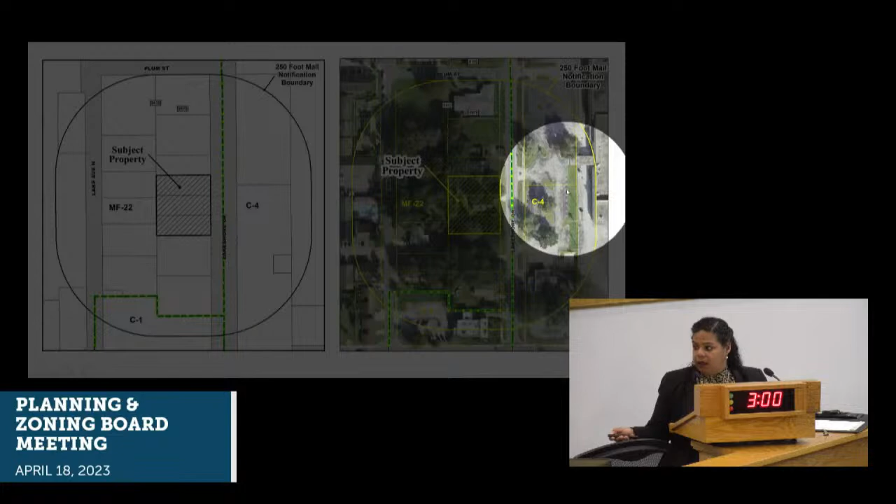The map displays here the general location of the property, and the surrounding uses are all single-family residential to the north, west, and south, and then a retail plaza to the east. The property is currently vacant on approximately 0.46 acres.

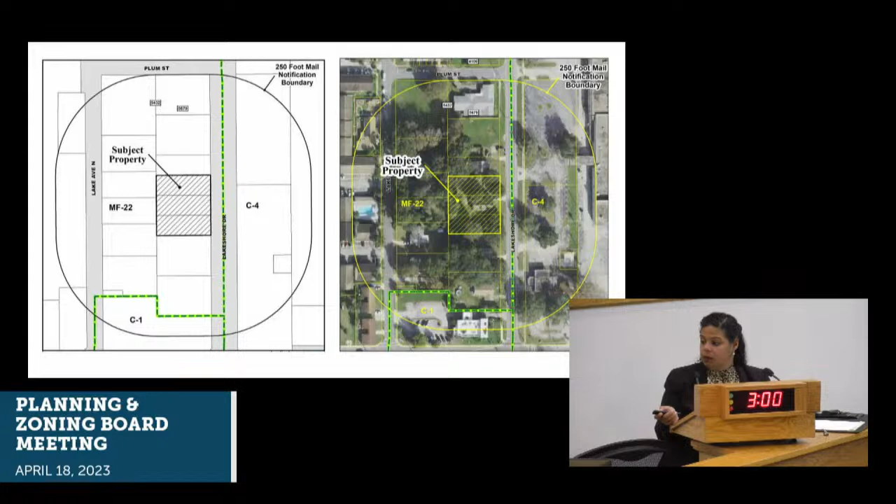These here are current images of the property. This is facing the property. There was a former single-family home that was recently demolished on the property, so the old driveway is still there. This is on the east corner facing northwest, and you see the adjacent single-family home in the foreground. This is the east property boundary facing west.

This is the adjoining plaza that's to the east of the property. This is the street view facing south towards East Lake Parker Street, and this is the street view facing north. This is the proposed site plan of the 2 duplexes that will be on the property.

Currently, the parcel is a 3-lot parcel, and it will be divided into 2 equal lots. The total lot size is 150 wide by 135 deep, so the parcels will be divided 75 feet equally just to have the duplex fit properly on there. I will stop here and allow the applicant to answer any of your questions before I read the conditions. This is for consideration of approval, to go to City Commission next month.

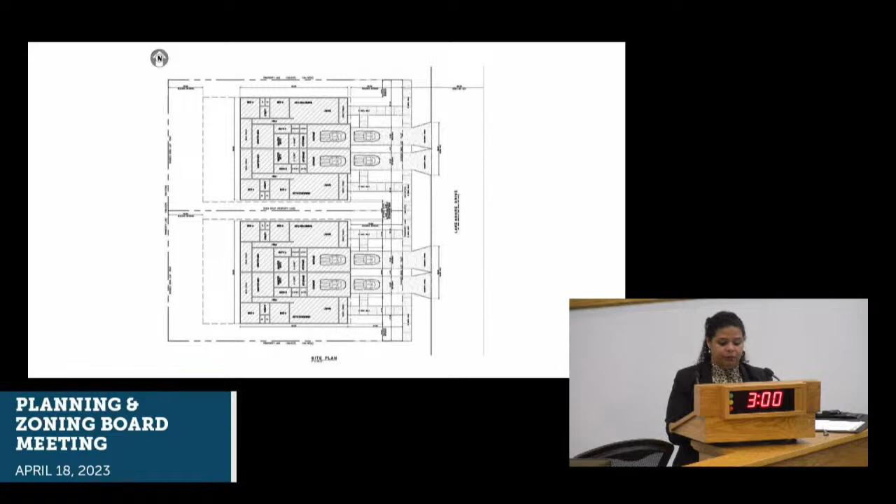Good morning, everybody. I'm Ben Beckton, born and raised here in Lakeland, and Samuel Graybill is our civil engineer who submitted the application. Our office address here in Lakeland is 227 North Tennessee Avenue, and my personal address is 3412 Lilas Court.

This is my first time speaking before you, so apologies for any mishaps. We acquired this property as a package of 18 homes that we purchased a couple of years ago. We just felt that the home was quite dilapidated and didn't merit a remodel, and there was a much higher use for the property in that area.

So we started this process and engaged Sam. Originally we were thinking of doing a larger project, but found that it was cost prohibitive and that there wasn't enough space for parking and drainage and things like that. So we combined the lot, but we feel now that dividing it and providing 3-bedroom duplexes to 4 families is an incredible use for it.

We're actually licensed general contractors as well, so we'll be constructing this project. So we have full control over getting it done quickly, efficiently, and building a structure that will be a benefit to the city long term.

We also, having dealt with lots of properties—I'm in the real estate industry here in Lakeland—there's a severe demand, as you likely know, for rentals in this area, and they've become almost a price gouging standpoint for the available inventory.

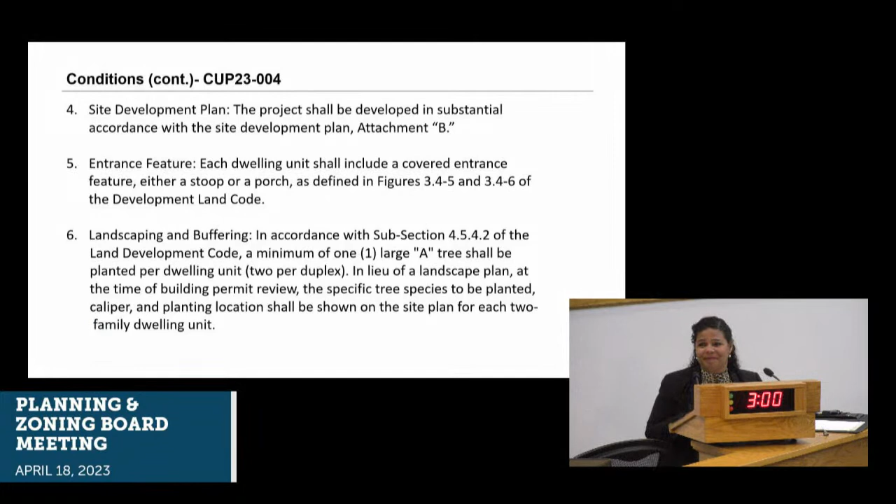Any questions from the board on conditions? None? Now do I hear a motion that we approve the request subject to conditions set up by the city? I move to approve with the conditions. Second? All in favor? Aye. All opposed? No. Motion's approved.

Item 2, minor modification of planned unit development zoning for Lakeland Central Park to allow for the allocation of existing multifamily residential entitlements within parcel 12 on property located at 2615 Airport Road. Owner LCP Phase 2 LLC, applicant Timothy Campbell, and this is for consideration of final decision.

Thank you, Mr. Roberts. Good morning. For the record, my name is Phillip Scearce. I'm Principal Planner with Community Economic Development. We have a minor modification to Lakeland Central Park development. We'll show you, this is the site here, New Tampa Highway, Airport Road. They have a spine road, Winston Park Boulevard, which connects with the Steeplechase on the east side of Airport Road.

So again, this is the site here. The site is currently under construction for Phase 1, which comes in these portions. The Winston Park Boulevard has not been punched out to Airport Road yet, but the area in question is right here. As PUDs get modified over time, or as in this case, as the more advanced engineering has occurred, not land uses get allocated, but storm ponds, wetlands, floodplain mitigation - those things kind of get altered as you get into that fine engineering, as you nail down the final engineering.

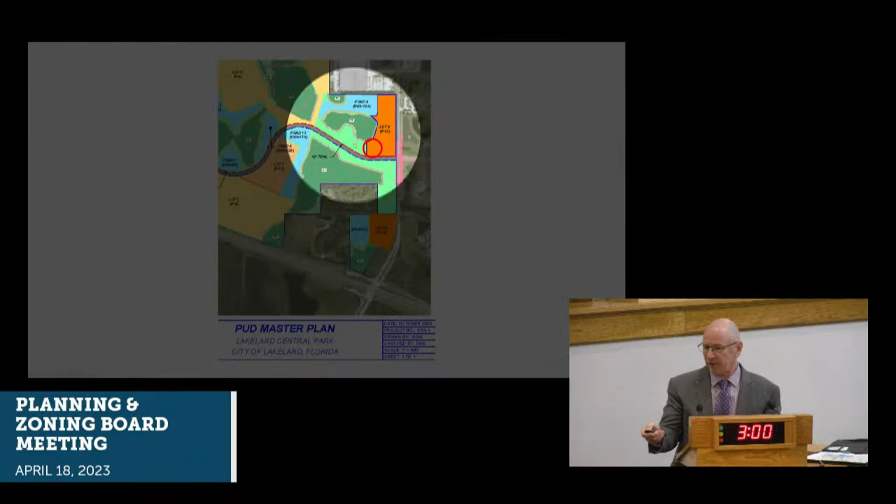It also is growing a little bit, and I'll show you here in a little bit more detail. That orange area is growing a little bit here to accommodate for that multifamily.

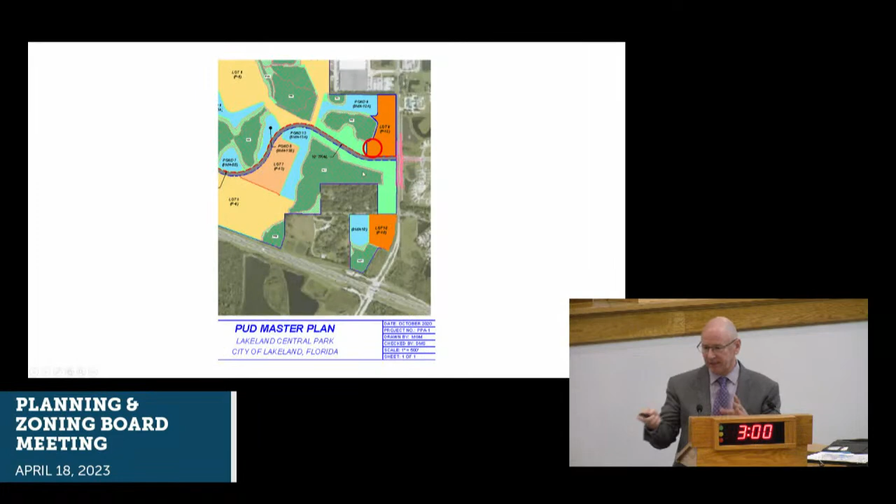Nothing else changed. Winston Park Boulevard on this portion, on this phase of Lakeland Central Park, has not been brought out to Airport Road yet. You'll see that in the slides here.

This is looking north on Airport Road into the site where the multifamily is proposed. This is looking southeast at Airport Road and Winston Park Boulevard, looking into Steeplechase.

This is looking directly at Laurel Highlands. Lake Laurel Highlands. Excuse me, I apologize, I get those mixed up. Lake Laurel Highlands. I should know that.

This is looking right at the west, right at Airport Road at Lake Laurel Highlands. This is where Winston Park Boulevard will get punched out eventually. And this is looking east into Lakes Laurel Highlands, standing on the sidewalk there on Airport Road.

The site plan, this is only a conceptual site plan for the multifamily. Multifamily and residential uses have already been included as part of this PUD. They're just moving the location. That's why this is a minor modification.

So this is Winston Park Boulevard here, and this is going to be the multifamily, 252 units. And I'm going to stop here and let the applicant come up and speak and give you some more detail about the project.

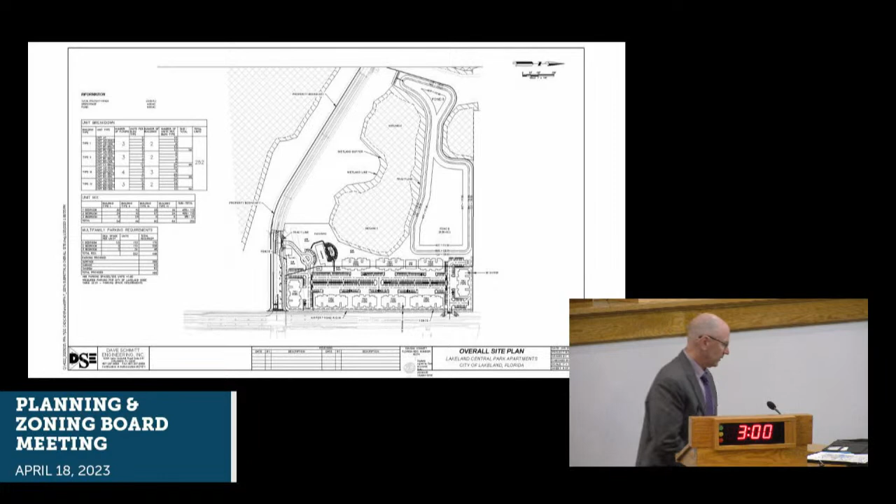Good morning. For purposes of your record, I'm Tim Campbell, law firm of Clark Campbell Lancaster Workman and Airth, 500 South Florida Avenue. I don't really have a lot to add.

This is pretty simple, and this is consistent with the staff's desire all along for Lakeland Central Park that it not be all industrial. They encouraged and desired residential and office type of uses, although it's a difficult site to do some of that. So what the developers found is that this parcel was ideal for a multifamily development, and it's allowed there except for that one prohibition in Exhibit C. So we're just asking that the prohibition be removed.

The change, and I'm glad the site plan's up, the change in the size of the parcel is to allow the access there on the spine road to be as far west as possible to keep it away from the intersection. So it's a relatively simple request. Thus it's coming to you as a minor modification. We stand available for any questions that you have and request your favorable consideration.

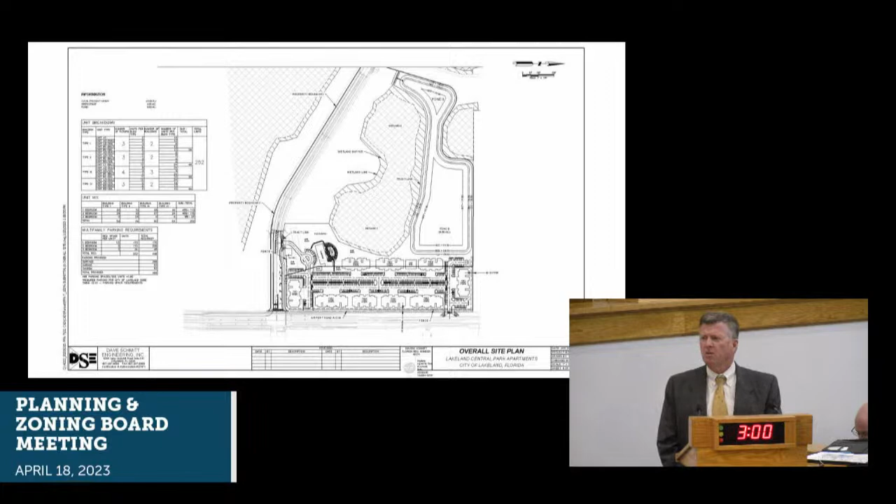And I'll jump in with a little additional background as well, that this was the former Lakeland Central Park Development of Regional Impact. It was approved back in 2008. It's a 729 acre mixed use development that has a history on it from the DRI, now Planned Unit Development and Zoning Ordinance. But it also has a development agreement in place which addresses transportation concurrency.

So in terms of this particular use relative to the retail, the trip trade-outs work, it all falls within the bounds of the development agreement that was approved by the City Commission back in 2020. So everything here is still part of the overall master plan, and as Mr. Campbell noted, it's our desire to see something that is a true mixed-use development.

What is good about multifamily on Airport Road too is it helps with the transition between more intensive warehouse uses as you start to move further west and north towards Old Tampa Highway and Lakes Laurel Highlands across the street. So there's a lot that really works in terms of this plan here that's shown on the screen.

We do have a couple of tweaks that were discussed at the development review team, primarily related to the location of the lift station and the ultimate taper. The driveway connection, or Winston Park Boulevard connection to Airport Road, is still going through the DOT permitting process, and so there may be some changes there that come out of that effort.

But there may be some tweaks related to the lift station and the ultimate configuration coming up to Airport Road. How big is that parcel?

I'm sorry, this site plan is just conceptual, and it's not part of our request today. It will go through the development review team process, so staff will have the ability to provide comment on the details about the layout of the plan.

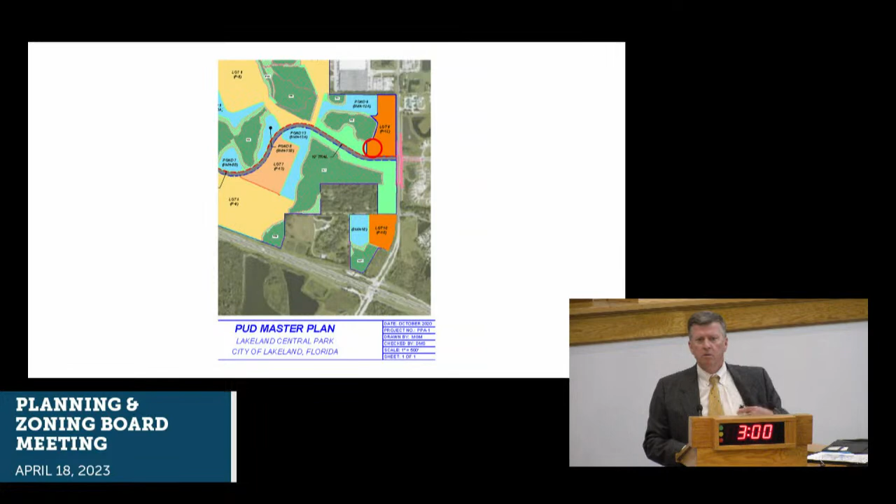Any other questions from the board? How many stories in height are these apartment buildings going to be? I don't know, the plans haven't even been submitted yet, other than this concept layout. They'll be whatever, we have all those restrictions built into the PUD, so we're not asking for a change to that. My guess is 3 stories, because that tends to be what's in the market now, a 3-story walk-up.

Any other questions at this time? So what's the background about why the restriction was there before? As I understand from the DRI, a lot of that just carried over to the PUD. Is this old DRI language? Good question. Chuck, do you remember why there was a prohibition on Lot 9?

I think the reason we had a prohibition there was trying to get more retail in the Airport Road corridor at a node that made sense. That was also back at a time when the multifamily market wasn't nearly as strong as it is today. Things have certainly changed over the past 15 years, and it makes sense now to get, at what will be a lighted intersection, more density, something that's a better transition with the single-family residential across the street, while we look at other opportunities for retail up and down Airport Road. That's really the big change, the market conditions and the fact that we need to be more cognizant of how we handle the transition from the warehouse industrial to the single-family to the east.

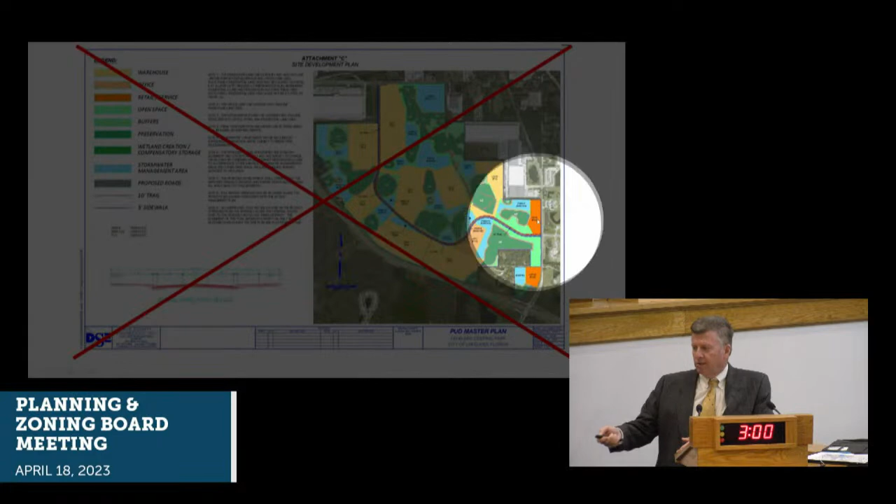Was it not the case that Parcel 6 was where the multifamily was originally intended? No, we're not moving it. The only thing we're changing is, there was literally something in here that says multifamily is prohibited on Lot 9, and we're removing that. But as I explained earlier, those residential uses are allowed in the orange-coded parcels.

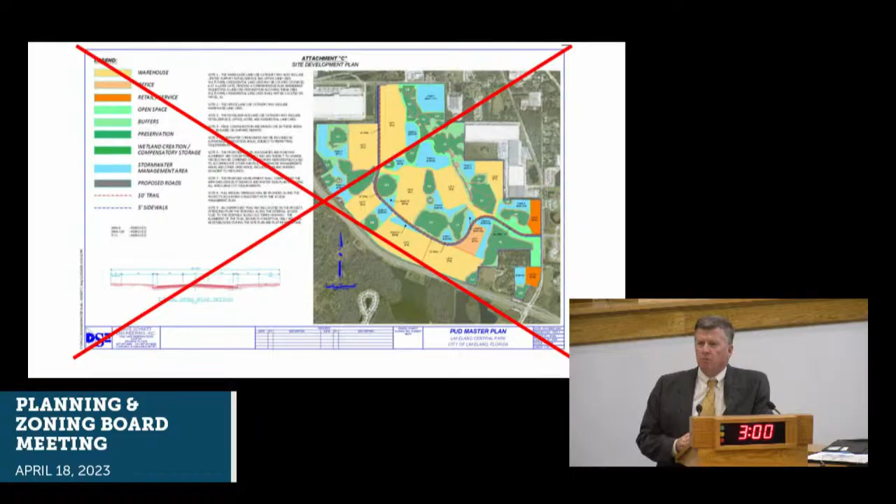As I understand from the previous hearing, these were anticipated for above retail dwellings. Am I incorrect in that understanding? Multifamily above retail? Yeah, that's never been a part of any of our presentations for Lakeland Central Park.

What is the language about the comp plan amendment associated with that note? This is in our PUD, so it doesn't change our comp plan designation at all, it's just within the PUD. My question is just about the note, the language of that note. Maybe somebody on staff can help me understand it. What does that language mean?

The note simply meant that on that parcel we could do any of the uses that fall within that orange, but not multifamily. I think Chuck probably explained it well, that at some point the thought was to encourage that mix, to encourage retail. The idea was that was the better spot for retail, but it's become obvious that it's not.

The note says the warehouse land use category may also include limited support retail, service, and office land uses. Multifamily residential land uses may be located on parcel 6 at a later date, pending a comp plan amendment requesting a land use designation allowing those uses. And that's to the west.

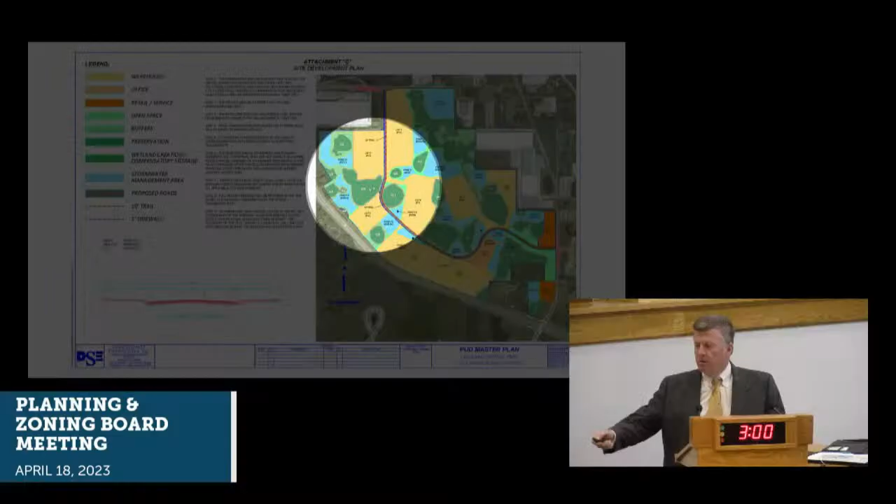As Chuck mentioned, phase one development is occurring here. You can see the pad on the Parkway being developed, buildings being developed here and here. So phase one is being developed. They're working on all the plans and approvals to gear up for phase two, and I believe the multifamily is in phase two.

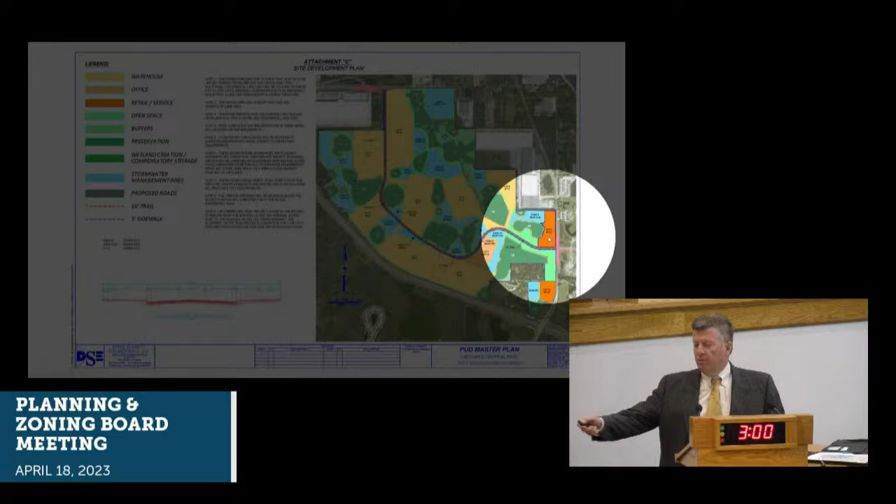One of the discussions we've had is if we plat phase two, even though this isn't ready yet, that we would plat this. So we'll move forward however the city requires, but since it's not phase one, we're not having to move the phase for the multifamily. My last question is, if we don't approve this today, where would the multifamily development fall in this plan?

Hopefully, in the unlikely event you would do that. I don't know. This site, at some point, if they acquired the other parcels—and this is the dark green, which is wet, so it's not developable—this is a more difficult site, so I don't know if it would be there or if we would lose the opportunity to have multifamily.

Within this industrial park, I think that's part of the staff's desire all along, and that's why the placement of these types of uses—the commercial retail and the multifamily residential—is along Airport Road, as Chuck mentioned, because it's a great transition from the single-family residential to the industrial.

And like I said, they've approved some commercial here, and at some point if we have commercial, it's really an appropriate planning transition into what will be all industrial and distribution facilities. So what I'm hearing is that this is really the last real potential for multifamily in this development.

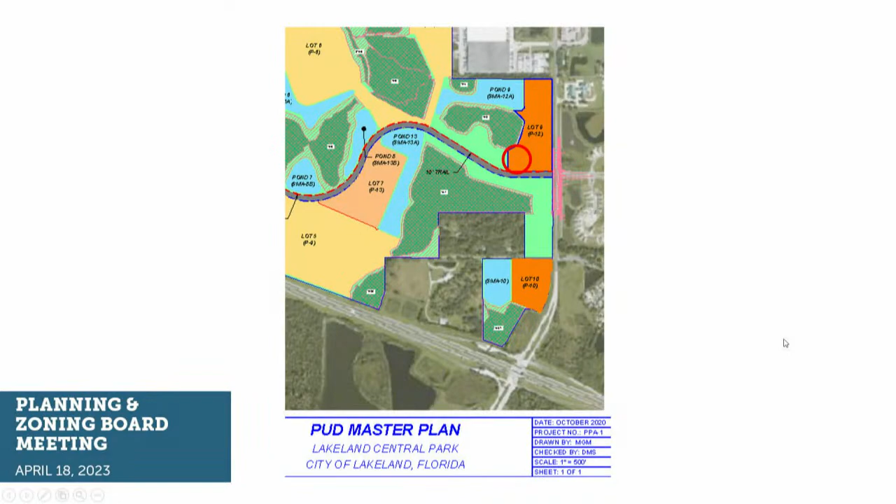I think that, because of the importance now of Western Park Boulevard and Airport Road, and just what we're seeing with the multifamily market, we all as staff agree that this really is much better situated, not only for road access but also transit service. The developer is working on a transit stop on Airport Road with the Citrus Connection, and we're working with them to potentially realign or better serve this area as well.

But it's better for them to do that off of Airport Road than more internal to the development. So I think, like Matt had said, the retail market is a lot softer out here than what it was, and the multifamily is so much stronger that it just really works from a connectivity and a location standpoint.

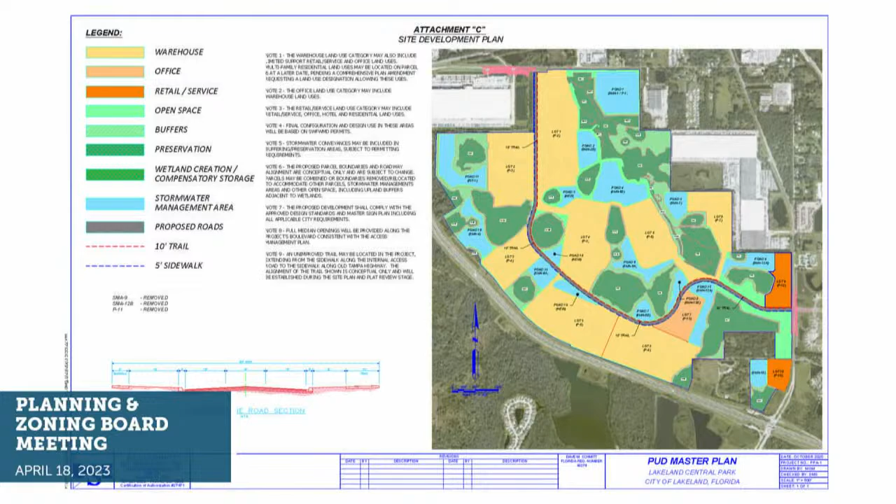As far as the history of this, an iteration of this plan earlier than what is proposed had orange here. So as far as the original intent, along that frontage it was all orange and multifamily. At some point, as we went into this site development plan, it was determined that may not be developable.

I'll tell you, if you ask where other uses are going, I think from an engineering perspective, they've determined that maybe they were kind of quick on the gun there. So I don't know if at some point they come back and propose to change that and have a mix of commercial retail or the rest of the multifamily. I don't know, but that would not be a minor modification—we'd have to come back and go through the whole process.

Any other questions of Mr. Campbell? Thank you, sir. Any comments from the public?

Again, Phillip Scearce for the record. There are no conditions associated with this.

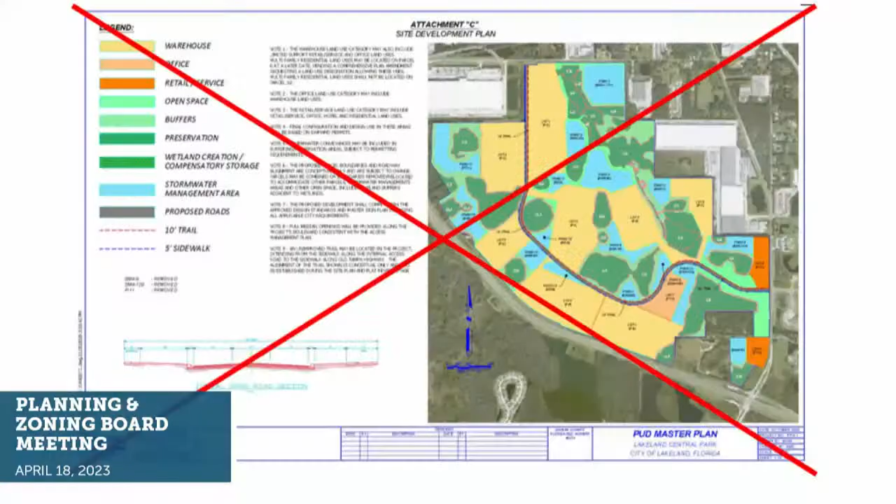The PUD will be modified to include this new attachment C. The previous attachment C will be stricken and deleted. This new attachment C has the language taken out prohibiting multifamily residential uses on parcel 9, lot 12 - I might have that backwards, but that's the only thing occurring here.

Again, the site plan that we showed you was just conceptual. They have to come back through site plan review and comply with all the standards of the land development code, including the buffers along Airport Road and their own development requirements there.

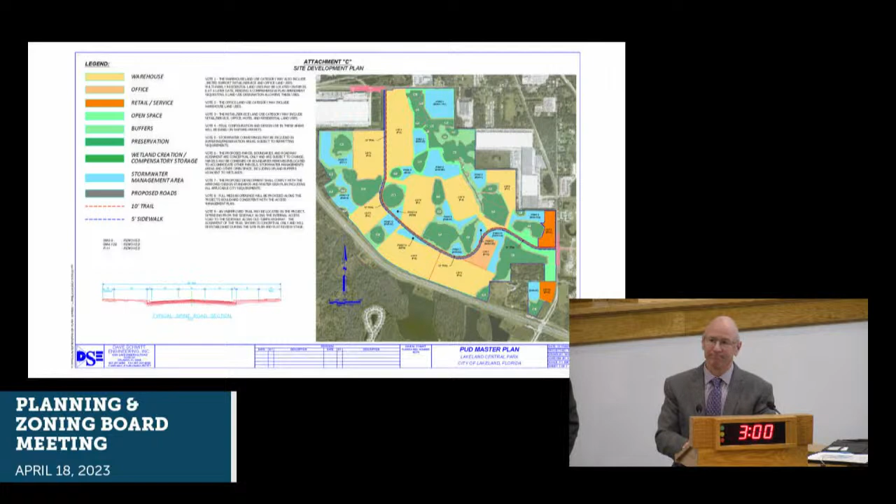So again, staff is recommending approval of the minor modification with a new attachment C. I hear a motion to approve the staff's recommendation subject to the adjustments that were just mentioned to us.

I move to approve staff's recommendation on this project. Is there a second? Second. All in favor? Aye. All opposed? Thank you, Mr. Chair and Board.

Okay, we move into our general meeting. Item 3 is the review of the March meeting minutes.

Has everyone had a chance to review the minutes? So I hear a motion to approve the minutes as presented to us. Motion to approve. Second. All in favor? Aye. All opposed? Motion passes.

Item 4, major modification of planned unit development zoning to allow for construction of a 41,000 square foot field house building, a 4,000 square foot expansion of an existing child care building, and relocation of existing off-street parking facilities on property located at 3620 Cleveland Heights Boulevard, Lakeland Family YMCA. Owner: Young Men's Christian Association. Applicant: Shelton, Rice, Peterson, and Myers, PA. Note, this is continued from a previous meeting.

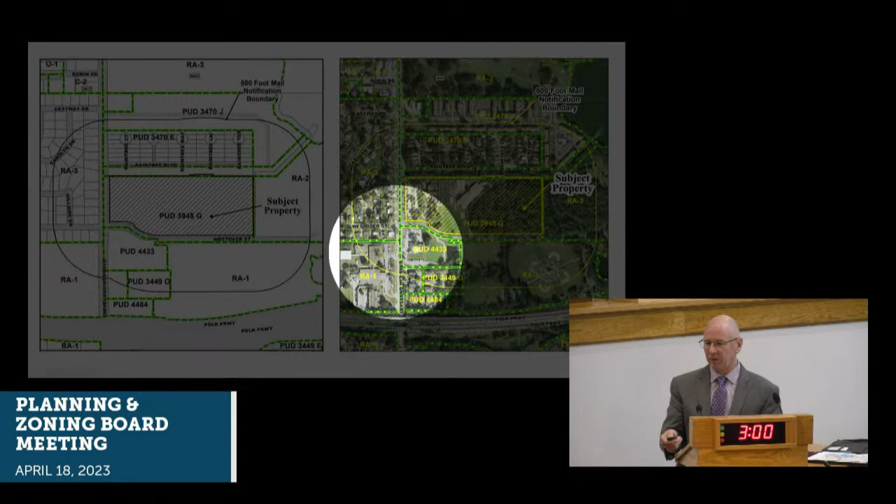But again, this is 3620 Cleveland Heights Boulevard. This is the YMCA that we all know on Cleveland Heights Boulevard. Here's the site, existing Y and Westover. This is Carlton Palmore Elementary School. This is Peterson Park. Very familiar with the area.

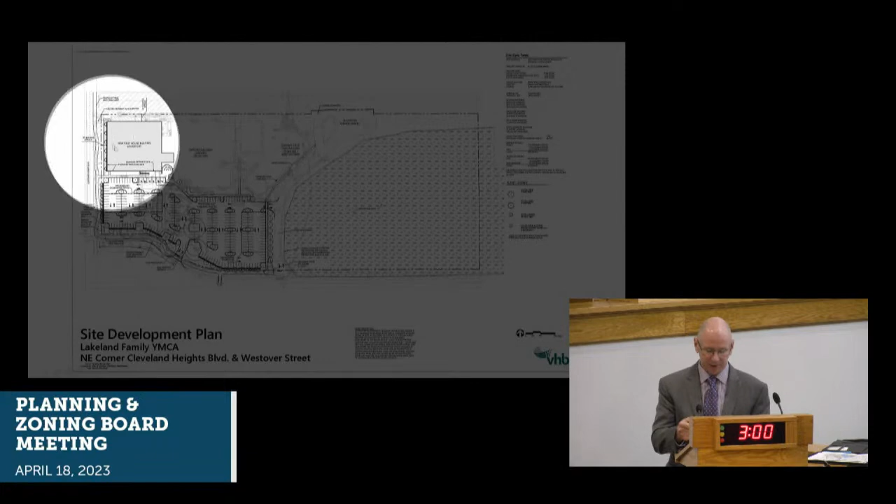The request was to add a 41,000 square foot field house building, and change the parking configuration. Westover will be the more primary frontage and access, which it is today, really, but it's more of a focus on Westover. This is the main building, and then there's an expansion of the child care center in the rear.

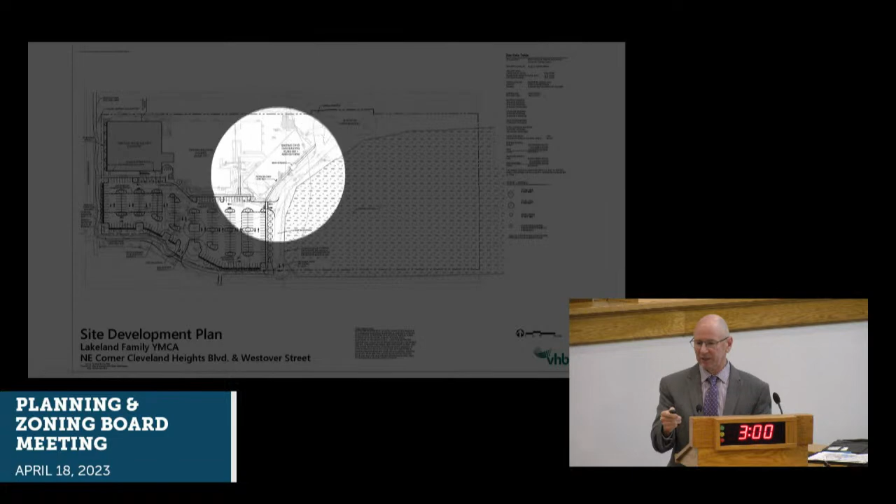Won't go into too many details. Again, this is blown up here. This is the field house. The expansion of the child care center is pretty much already under roof already - they're just going to be filling that in, adding more square footage, or just gross floor area to that child care area.

There will be primary access points along Westover, again with the new parking configuration. This also includes portions of Three Parks Trail - did I get the name right there, Chuck? I apologize - Three Parks Trail, yeah, my apologies, getting names wrong. They also have pedestrian access connected to the field house as well.

There's an existing wetlands here, and nothing is being modified there. There's a city canal that runs from under Cleveland Heights Boulevard over to Lake John. I did get a call from the neighbors to the north saying they want to keep that canal acting as a buffer to the Y, as nothing is proposed within that canal. It will remain city-owned and maintained, not being modified. The only thing we're doing is adding that field house.

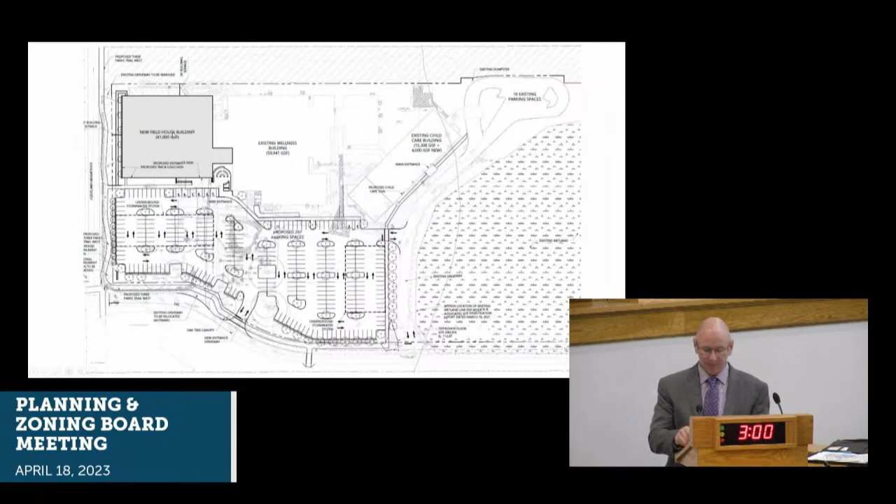Won't go through all the details of the staff report - we'll just give you the history of the Y and an explanation of the changes. We're going to go into the conditions. This is coming to you with a recommendation of approval.

I'm going to go over the general conditions, and then we'll have Mr. McCloskey, our transportation planner, discuss the transportation conditions. So we are recommending approval. It is recommended that the request for a major modification of the PUD as described above in Exhibits A, B, 1, 2, 3, and 4 be approved subject to the following conditions: Attachment G of Ordinance 3470 as amended, land use intensities, PUD 30.

B, permitted uses: indoor and outdoor recreational uses operated in conjunction with the YMCA. C was stricken, the setbacks language. Minimum building setbacks shall be shown as shown on the revised site development plan as attached in Exhibit 1.

Access: the main point of access to the property shall be from Westover Street. And that's that condition. Landscape buffer: landscape buffering shall be in accordance with Section 4.5 of the Land Development Code.

F, signage: a double-faced primary identification sign may be located on the northeast corner of Cleveland Heights Boulevard and the entrance road to Curtis Peterson Park, in accordance with the attached sign plan and sign drawing in Exhibit 2, subject to a maximum sign area of 72 square feet per face.

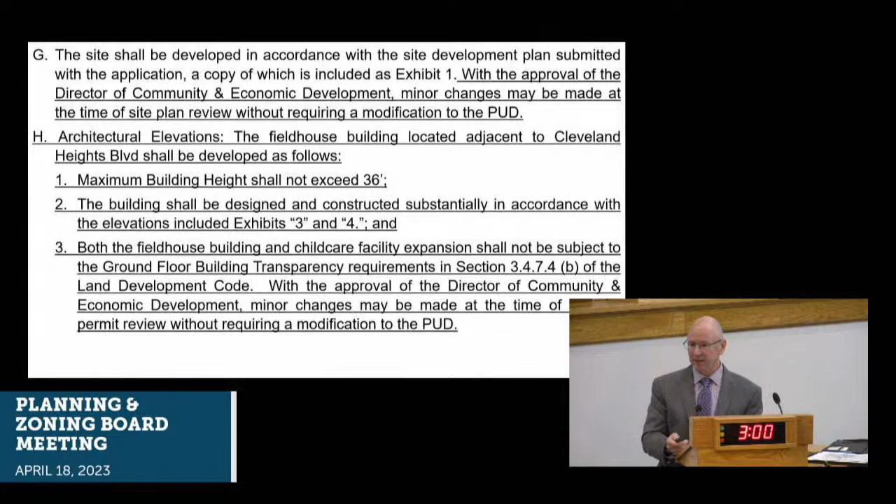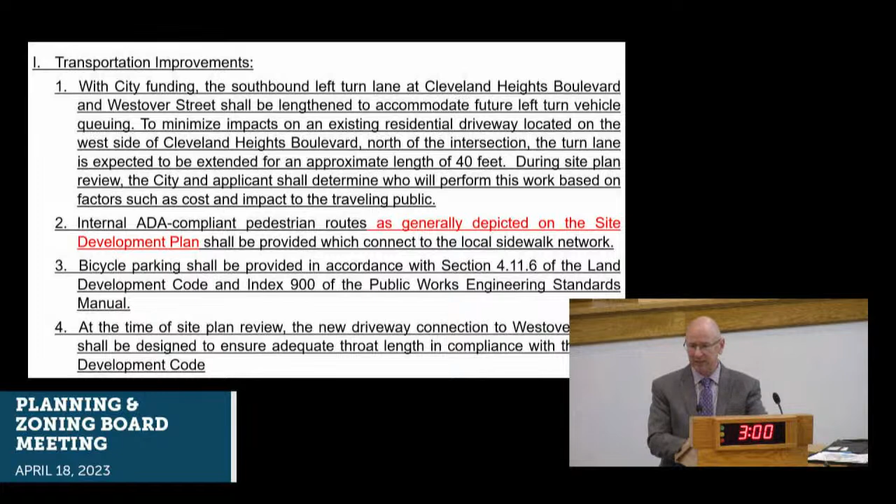At this time, I'm going to turn the presentation over to our Senior Transportation Planner, Terry McCloskey, to discuss the transportation improvements conditions.

Good morning, I'm Terry McCloskey, a transportation planner with the Department of Community and Economic Development. I'm going to go over the transportation part of this. I'm going to read it as it is for the record, and then maybe I can explain it a little bit.

With city funding, the southbound left turn lane at Cleveland Heights Boulevard and Westover shall be lengthened to accommodate future left turn vehicles queuing. To minimize impacts on an existing residential driveway located on the west side of Cleveland Heights Boulevard, north of the intersection, the turn lane is expected to be extended an approximate length of 40 feet. During site plan review, the city and applicant shall determine who will perform this work based on factors such as cost and impact to the traveling public.

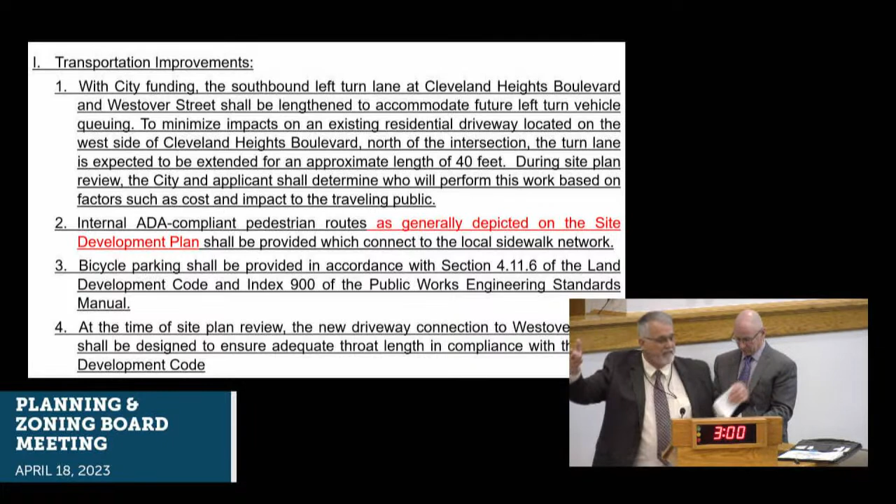The way they were built in the past, they have these really long tapers on them. We observed, and their traffic analysis showed, that if we could get that turn lane back, we could accommodate the demand of vehicles that we want to turn there in the future. So part of this is to get that turn lane lengthened so you can clear that lane and people can keep going. If you've ever seen it out there, it's almost like a one-way, and they get gaps to turn. That's the improvement.

Internal ADA compliant pedestrian routes, as generally depicted in the site development plan, shall be provided, which connect to the local sidewalk network and the three parks trails. You can see on the site plan they've done a good job of giving us pedestrian network connectivity.

Bicycle parking shall be provided in accordance with Section 4.11.6 of the Land Development Code and Index 900 of the Public Works Engineering Standards Manual, which is basically a parking area for bicycles with a certain type of bike rack, within about 40 feet of the entrance.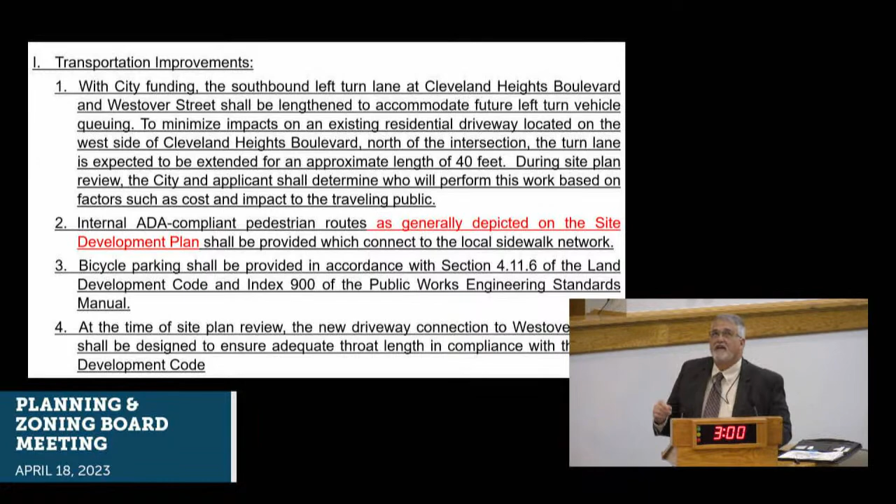At the time of the site plan review, the new driveway connection to Westover Street shall be designed to ensure adequate throat length and compliance with the Land Development Code. That's kind of a normal thing. We wanted to point out, I don't think there's any more, is there? No, we wanted to point out that there was two other things that came up.

We had asked them to provide lighting at the Westover and Cleveland Heights intersection because only half the intersection is well lighted on the south side. They were talking about doing it, but Lakeland Electric has stepped in and put that under the street light fund, and they're going to put the other pole out there, so it'll be a nice, safe intersection.

We also wanted to get the crosswalk markings in that intersection redone. Turns out there's a resurfacing job coming through, so they'll be redone under that. The intersection will be nice and safe for the people that go over to the park, the Y, and the school. I think that's about it, unless Chuck wants to add more.

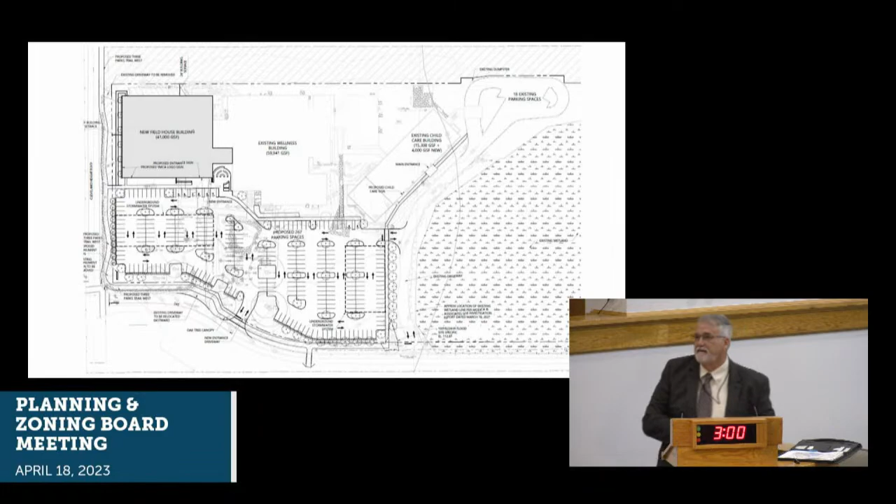No, I think Terry, you covered it well as far as the traffic analysis. The project generates about 1,300 additional daily trips, about 120 in the morning and 150 in the PM peak. The conditions as written will address the additional impact associated with the project. The site plan really does address connectivity to the Three Parks Trail, which is funded through DOT, under design by the city of Lakeland, and scheduled for construction later this year.

Once that's done, that will complete the Three Parks Trail loop, about a 3.5-mile loop from Edgewood all the way down to the Y and Peterson Park. So we're anxiously waiting for that to happen. Everything's all starting to come together at this location at the same time.

I have a quick question. The ingress and egress driveway for the Y, is that directly across from the ingress to Cleveland Heights Animal Hospital, or is that one a little bit farther east? There's an offset in there. It was really kind of a balancing act to try to get the driveway connection as far back from Cleveland Heights as possible, but also not impact the large trees just to the east of that. We're comfortable that the driveway placement there won't create any additional operational issues with the animal hospital to the south.

Oh, I'm happy to see the extra 40 feet because I just drove that yesterday. It's busy, very busy. The other egress that used to be on Cleveland Heights is closed also. Exactly, so a little safer there too.

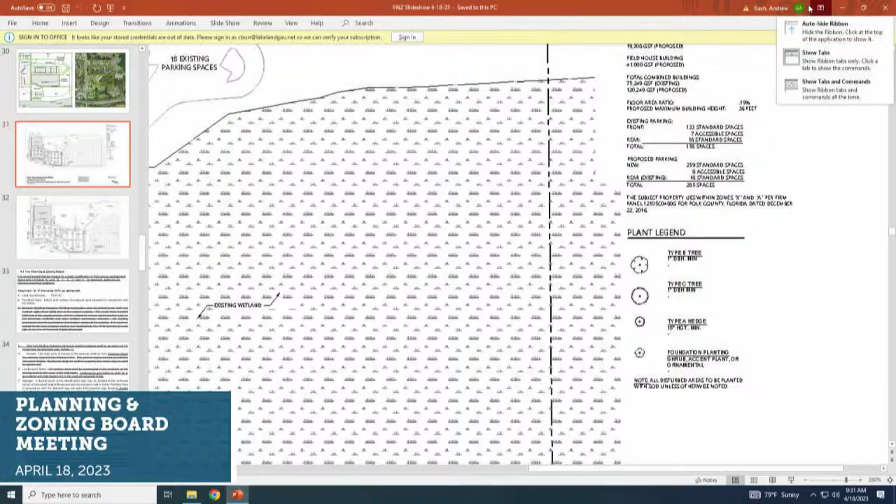There it is, 267. 158 to 285 spaces, as opposed to 158 spaces, they added. That'll help. Definitely a substantial increase, in recognition that sometimes that parking lot is just slam full. Yeah, they're parking in the road, they're parking on the grass under the trees and everywhere else.

I've never seen them park on the road. I think people who go to Peterson Park for the baseball games are perhaps the ones that park in the road, but I've never seen people from the Y do that, because the entrance... Saturday mornings have that stuff too. Well, this'll help. There you go. Definitely, definitely.

Any other questions for me? Turn it back over to Phil. Make the sign nice. I'm going to ask Shelton Rice, of Peterson Myers, to see if he has any words on staff's presentation and recommendation.

What's the location of existing off-street parking? Good morning, for the record, my name is Shelton Rice. I'm an attorney with the law firm of Peterson and Myers, address 225 East Lemon Street, Lakeland, Florida. Today I'm here on behalf of YMCA. I'm sorry about the cough, my 4-year-old who started preschool has brought home every bug he's come across.

Mr. Scarce, we appreciate your presentation and all the staff's work. We continued this at the last hearing so that we had a little more time to work through the conditions, to iron out some of those details. I believe we've done that. I believe the conditions that Mr. Scarce has presented are acceptable. We agree with all the statements that they've made.

We think this is a good project. We're improving the parking, providing this additional 127 parking spaces, providing this new Jenkins Field House. So this will be a general benefit to the public. We think this is a good project with a good team, and we appreciate all the staff and the city's support in getting this done. We'll stand for any specific questions you have. We appreciate your time, we request a favorable vote. Thank you, any further questions?

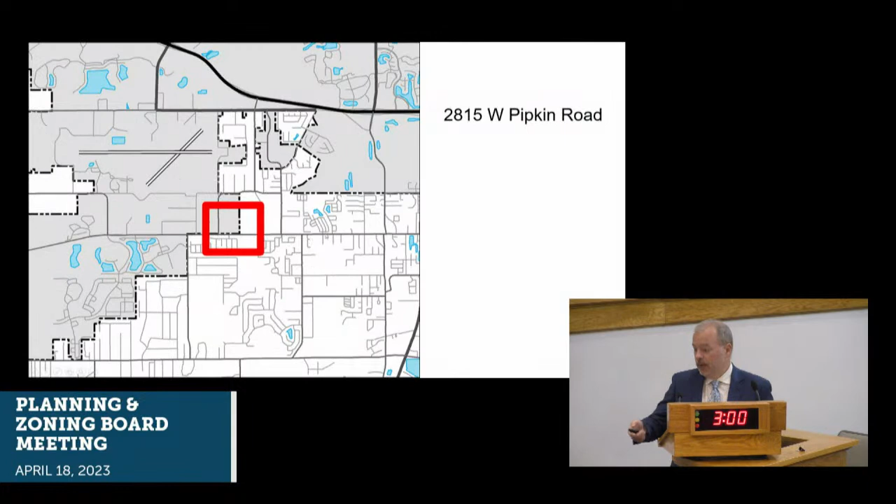You can see the airport, and there's West Pipkin Road right there. The subject property is just under 2.5 acres in size, and as you can see, is currently undeveloped.

It was annexed into the city in 2008 as part of a larger initiative annexing 159 acres. In 2010, it was assigned a business park future land use designation. However, for some reason at that time, zoning was not applied for, so it has no zoning, and that's why it's in as a PUD to develop.

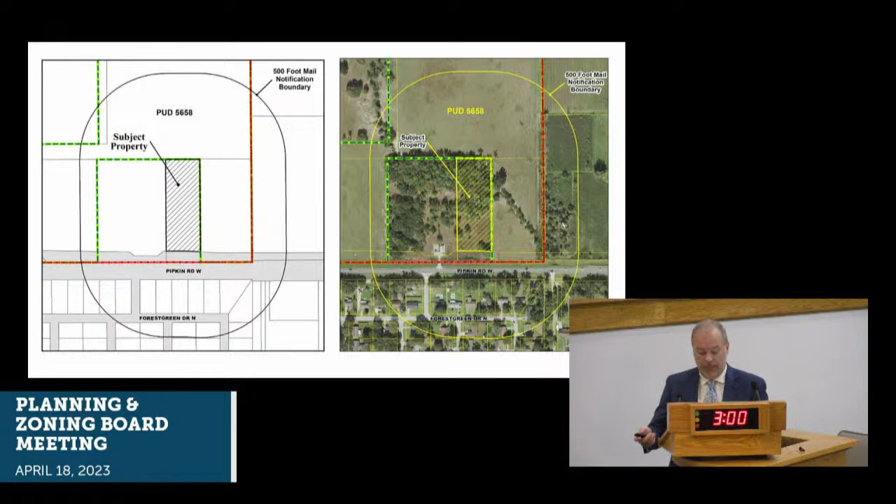Again, as we saw on the location map, the proposed development is located southeast of Lakeland Linder International Airport and on the north side of West Pipkin Road, which serves as a major east-west corridor between South Florida Avenue and County Line Road. The applicant's plans call for 2 office warehouse buildings, each approximately 9,800 square feet in size.

In accordance with the comprehensive plan, the area located south and east of Old Medulla Road and north of West Pipkin Road has been identified for the future development of business park uses in support of the airport. These proposed uses are similar to those found in Parkway Corporate Center, which is located to the east of the airport along South Pipkin Road.

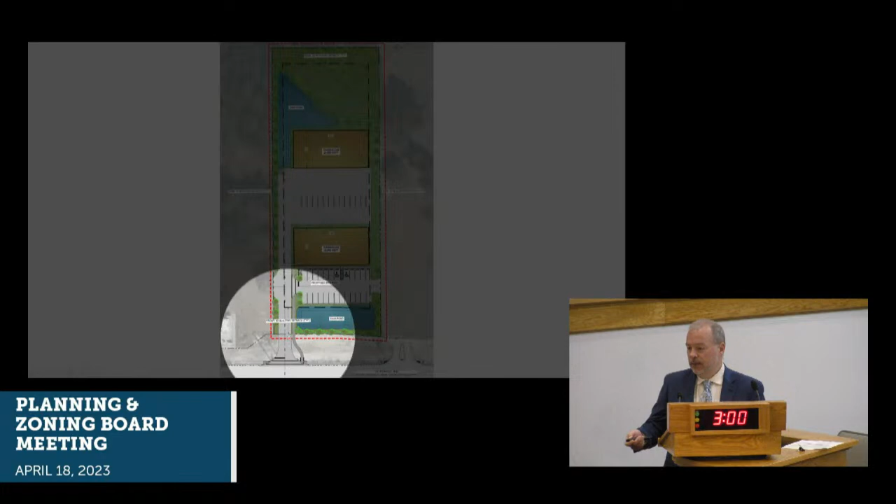Adjacent to the subject property, West Pipkin Road will have sidewalks and bicycle lanes on both sides of the roadway. Construction of these roadway improvements is expected to conclude next year in 2024. The applicant has coordinated this access point to the subject property with Polk County, so there shouldn't be an issue there.

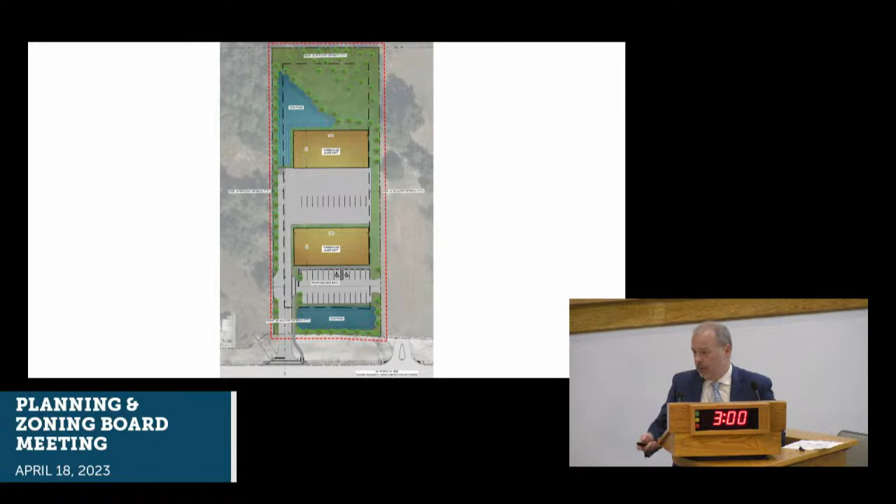So these are the uses being permitted: office uses, non-medical, office type research and development, warehousing and motor freight transportation uses level 1, industrial service uses level 1 but not automobile towing services, and wholesale trade uses level 1.

The first use permitted for the PUD is non-medical office uses, which are establishments that primarily focus on activities conducted in an office setting, such as administrative offices for businesses and government agencies, professional offices, and financial services. Examples include lawyers, accountants, architects, engineers, financial businesses such as lenders, brokerage houses, insurance agencies, real estate agencies, and financial planners, and the like.

The second use we were permitting in the PUD is office-type research and development facilities, which are research and development activities not involving processes or activities of an industrial nature. Such uses include establishments performing research and development on a contract basis, as well as facilities of manufacturing or other activities performing proprietary research and development. I think the key there is not of an industrial nature.

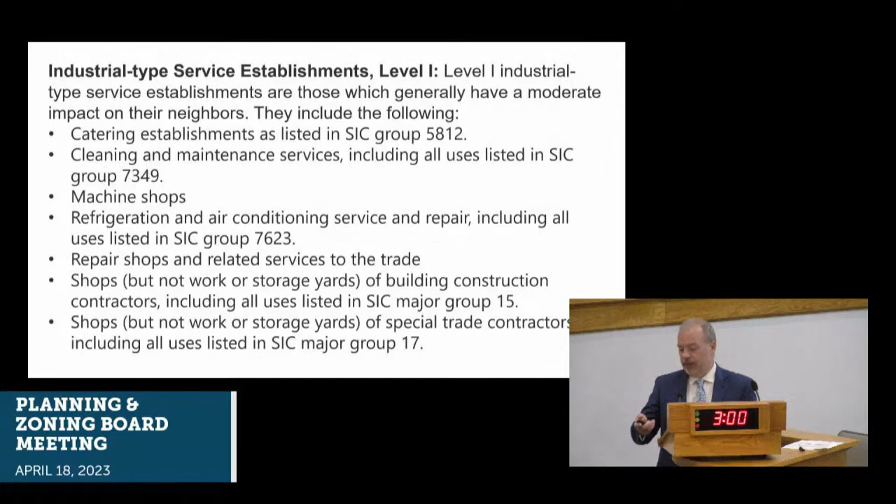The next use permitted in the PUD is industrial type service establishments, level 1, which generally have a moderate impact on their neighbors, including catering establishments, cleaning and maintenance services, machine shops, refrigeration and air conditioning service and repair, repair shops and related services, shops but not work or storage yards of building construction contractors, and shops but not work or storage yards of special trade contractors. There are some SIC groups there too to further round out the uses.

I think this is the final one: wholesale trade uses level 1. Again, they generally have a moderate impact on their neighbors and include things like electrical goods wholesale trade, furniture and home furnishings wholesale trade, hardware and plumbing and heating equipment and supplies wholesale trade, professional and commercial equipment and supplies wholesaling, and sporting, recreational, toy and hobby goods wholesaling.

And then with your permission, I'll let you know that we have received no communication from the public. Nobody had any comment on this proposed PUD.

And the conditions of approval, A, permitted uses - we've kind of already gone over this, but office uses, non-medical, office type research and development, warehousing and motor freight transportation uses level 1, industrial service uses level 1 but not automobile towing services, and wholesale trade uses level 1.

B, site development plan. The project shall be developed in substantial accordance with the site development plan included as attachment C. With the approval of the Director of Community and Economic Development, minor adjustments may be made at the time of site plan review without requiring a modification of this planned unit development. I'll make that change for the City Commission.

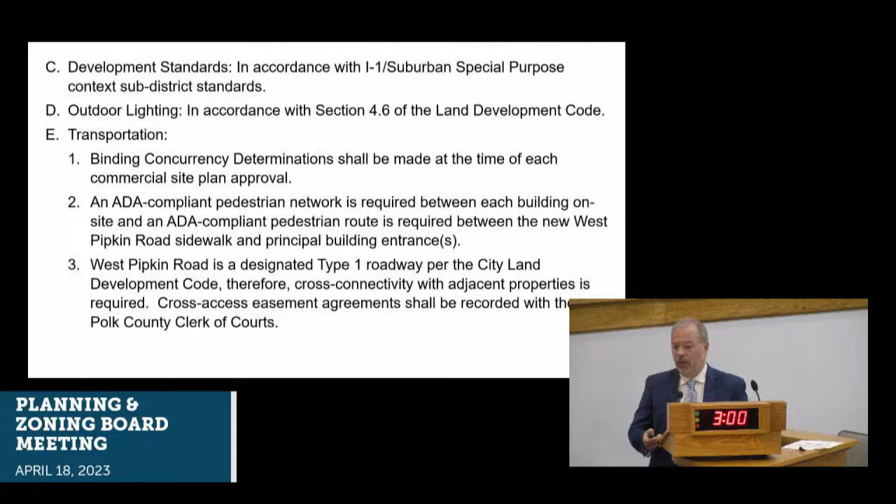3, West Pipkin Road is a designated Type 1 roadway per the Land Development Code. Therefore, cross-connectivity with adjacent properties is required. Cross-access easement agreements shall be recorded with the Polk County Clerk of Courts, and I think I talked about that in my presentation. Still staying with transportation.

4, the West Pipkin Road driveway throat length shall comply with section 4.2.5.2, throat length, of the City Land Development Code. 5, bicycle parking shall be provided in compliance with section 4.11.6 of the Land Development Code and Index 900 of the City Engineering Standards Manual.

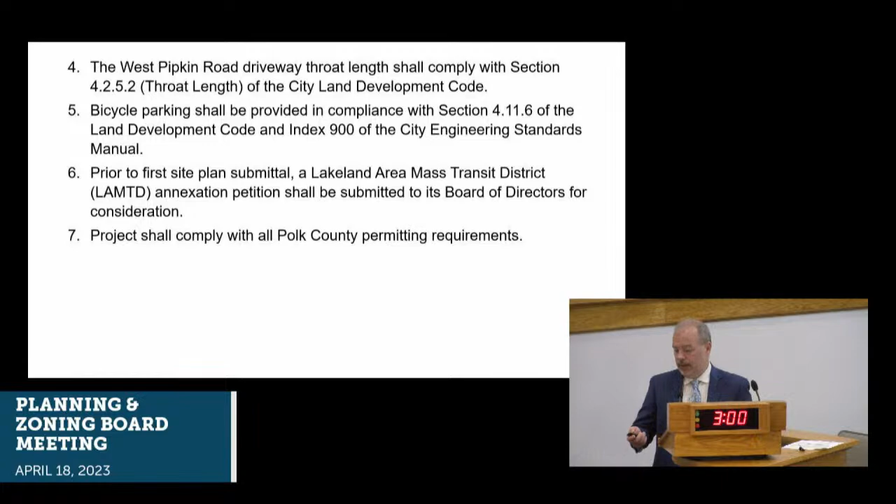6, prior to first site plan submittal, a Lakeland Area Mass Transit District annexation petition shall be submitted to its Board of Directors for consideration. And 7, project shall comply with all Polk County permitting requirements. I think that's all we have for that, so I'll stand for any questions.

I'm going to bring the site plan back up. Any questions?

I need to recuse myself from this. I've submitted the paperwork. My firm's engaged by Polk County for the widening of West Pipkin Road, so any potential improvements that might come from this could benefit my firm, so I'm recusing myself.

Okay, any other comments or questions? We have a motion, I assume, to approve? I move to approve the plan according to city recommendation. Is there a second? Second. All in favor? Aye. Opposed? Motion passes. Thank you.

Item 6, change in zoning from limited impact office to plan unit development to allow for professional office and limited office support, retail, and personal service uses on property located at 2330 Commerce Point Drive. Owners: Tamar Capital LLC, Tinsley Family Properties LLC, and Practice Building LLC.

Applicant James Edwards. Hi, good morning again. For the record, Philip Scearce, Principal Planner with Community and Economic Development.

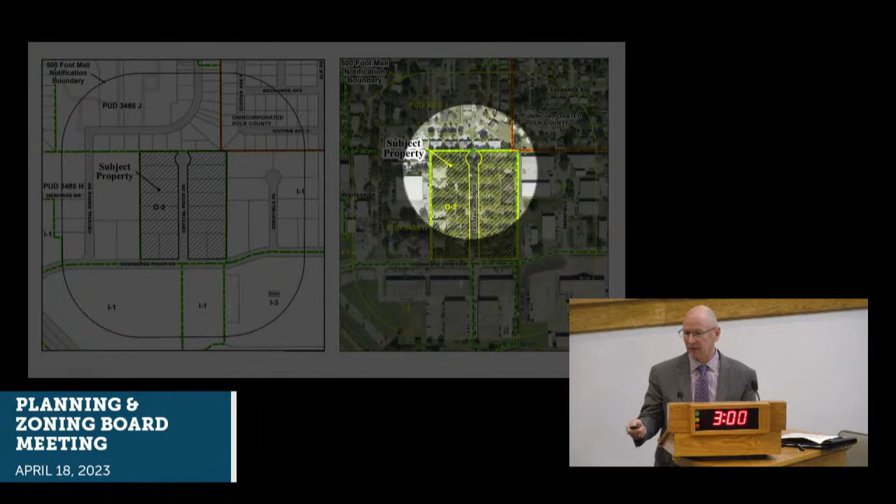As I stated, it's about 9 acres, again 8 buildings, almost 80,000 square foot of uses. And I'm going to go and read the conditions, because I want to get the conditions read, because it's to describe the new list of uses.

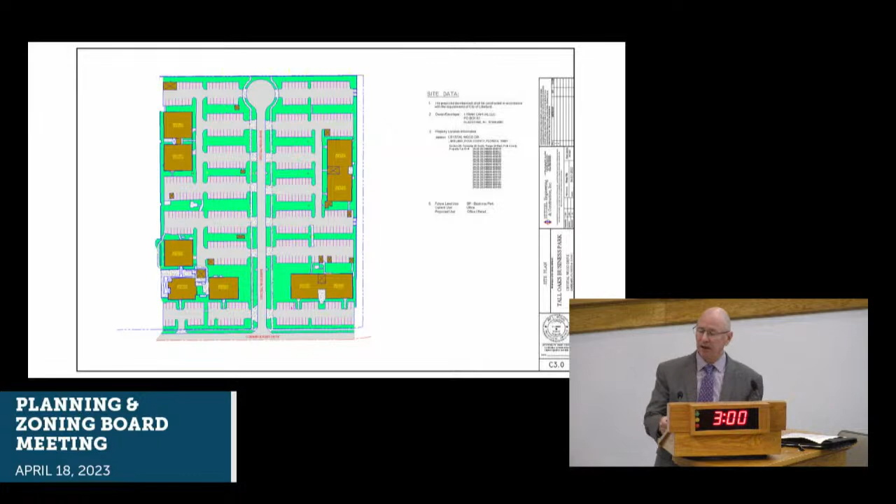But the site plan, it's important to note here that there is no development occurring with this PUD at this time. This is kind of a what-you-see-is-what-you-get site plan. So this is the existing conditions that are out here on the site today with the buildings, structures, and parking. If they want to add new buildings, they'll have to come in for a modification to the PUD.

It is recommended that the request for a change of zoning from O2 to PUD, as described above in attachments A, B, and C, be approved subject to the following amended conditions. And we'll go through the permitted uses. I went through these last month, but we're just going to run through them again.

The permitted uses: office uses, medical and non-medical, and research and development; office support retail uses, business development, computer stores, drugstores and pharmacies, office furniture and office supply stores, sandwich shops and snack bars; personal service uses, barbershops, hair salons, and day spas, business service centers including pack and ship stores, delivery services, exercise, fitness and martial arts studios, music and dance studios, photocopying, offset printing and similar reproduction services, tailor and dressmaking shops, tax return and preparation services, travel agencies, vet clinics and hospitals but not kennels. And also those uses operating under these characteristics similar to the above, as deemed compatible with surrounding uses and as determined by the Director of Community Economic Development.

Community facilities, churches, synagogues, and other houses of worship, adult daycare centers, child daycare centers, vocational training for activities permitted in the district where this is located. I think that has big potential there, which is not a permitted use in the O2, which is these vocational training centers and schools. Can be public, private, elementary. I doubt elementary public would locate here, but a small private school, Montessori type, things like that.

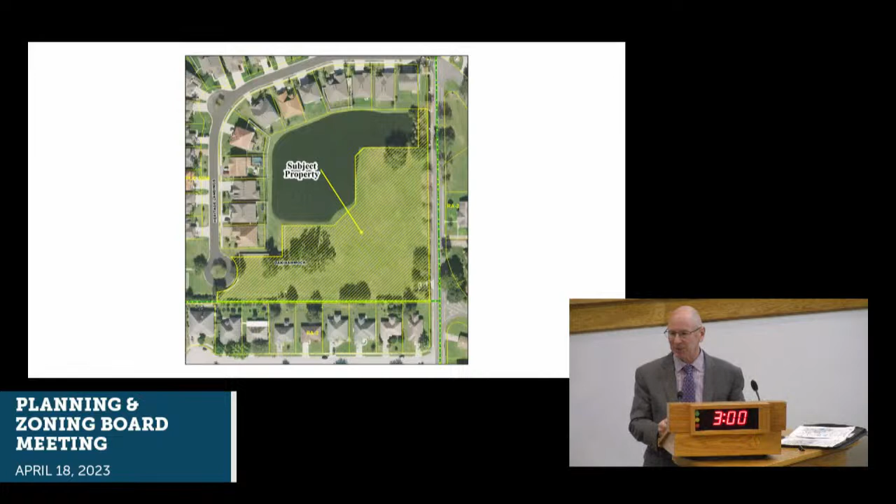This is the plat here. Again, 37 lots, these are townhomes. There are 4 structures under development currently. The construction has advanced far enough to allow construction of some model homes out there. And the only item remaining is there's a water utility easement that'll have to be relocated, but that's been relocated, the easement just needs to be vacated, and they're going through that process as we speak.

Again, we just recommend your approval for this plat, so when they are ready to get the mylars and everything signed, we can take it and get it recorded, and they can start selling lots. Stand for any questions you may have. Any questions?

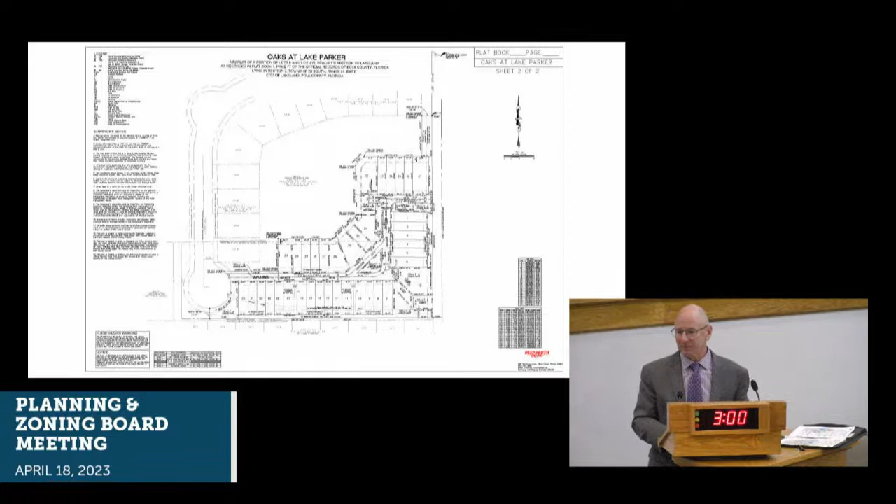Is there a motion to approve the request? So moved. Second. All in favor? Aye. All opposed? Motion passes.

Thank you, sir. Item 8, report of city commission action on planning and zoning board recommendations, along with planning and transportation manager's report. All right, well, we're almost at the finish line here. Yesterday the city commission approved the Family Worship Center daycare, the OK Cars expansion and conditional use, the Lakeland Loft expansion downtown, as well as the Lakewire Apartments zoning change to MF22 zoning.

All that was approved by the city commission yesterday. So the P&Z's recommendations were all approved. They ran the table. We've got a couple of items coming up, 3 items for the next meeting for hearing.

The first would be a conditional use to allow for a preschool at the Northside Assembly of God on Robson Street. The second would modify the PUD out at Airport Commerce Center to allow a hotel instead of the 2 fast food outparcels facing Drane Field Road. This is very close to the Drane Field Airport intersection. And then one for the installation of a solar farm at Noah's Ark, north of Lake Crago Park and south of State Road 33. So those are the hearings coming next month.